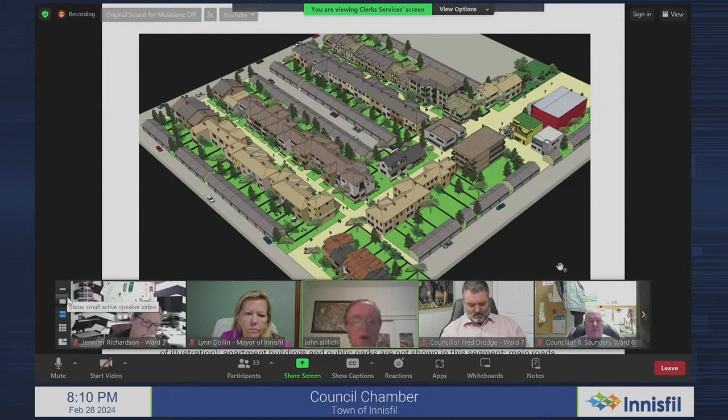There is a slide, maybe it can be shown - a partial view of the kind of thing I'm talking about. Yeah, that view is what we came up with. It's just one example, not the be-all-end-all, but it shows that something different can be done that's more livable, more friendly.

It's not complete. It doesn't have some of the apartment buildings that are necessary, and some of the larger acreage of land, open space, and so on. There's also stormwater management area and so on. But even so, that's just an example.

It basically shows a very pedestrian-oriented environment, like you're trying to do with the secondary plan. You can see rows of attached homes of various designs and sizes fronting on what's called a pedway - a walkable, sellable corridor, free of automobiles but wide enough for emergency vehicles. Mixed use in that sense: 900 square foot homes, 3,000 square foot homes, all together, plus access to non-residential spaces.

If you look at the right-hand side, some non-residential services, shops and cafes and so forth. I think what you get in that kind of community is that it fosters casual contacts. You get to know your neighbors, neighbors become friends, and there's a better sense of personal ownership and care of the neighborhood and the environment.

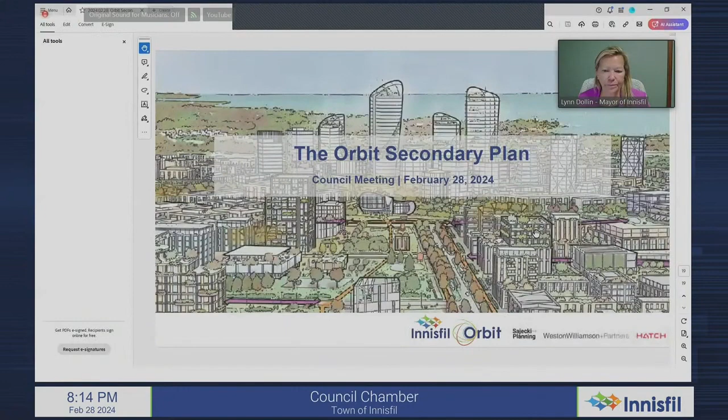You did, thank you. Thank you, Mayor Dollin and members of council. As just mentioned, my name is David Sajecki from Sajecki Planning, and we were part of the consultant team along with Weston Williamson and Partners and Hatch, who were developing the Orbit Secondary Plan. I'm very excited to present the secondary plan tonight. By sustainably focusing growth, council and staff have provided direction to develop a plan that protects Innisfil's agricultural and natural heritage and Lake Simcoe.

There's a saying in planning circles that some places have no 'there.' That's not the case here. Orbit builds upon a beautiful setting with views of Lake Simcoe, significant woodlands, and heritage buildings and landscapes. In developing the plan, we've tried to build upon and incorporate each of these elements, and we have an opportunity to create a special 'there.' Next slide, please.

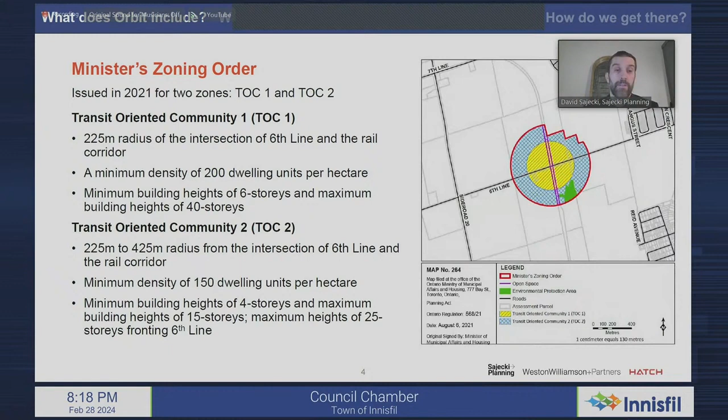This ministerial zoning order was issued in advance of the secondary plan, and the secondary plan is required to be consistent with it. It identifies that the ministerial zoning order prevails where secondary plan policies conflict with these area-specific regulations.

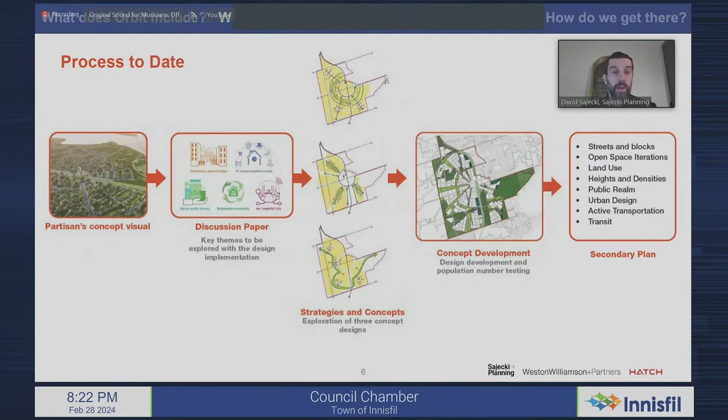This is the timeline of the secondary plan itself. The project started far before, with the Partisans concept as well as the ministerial zoning order. The secondary plan and the Orbit potential innovation plan commenced in March 2022.

Between April and August of 2022, there was a series of community engagement events. A preliminary preferred concept was selected in September 2022, with a series of other consultation events to inform that occurring during the following winter of 2022. This plan was further refined and developed into secondary plan policies throughout 2023.

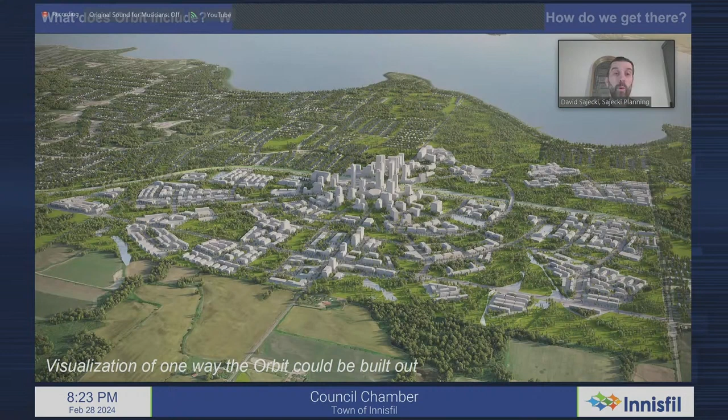This slide is an image of what Orbit is trying to achieve. It's just a visualization of one way Orbit can be built out. It's guided, consistent with the Partisans concept, by the Garden City movement, to produce relatively economically independent places with short commute times to surrounding areas, as well as protecting the preservation of the countryside.

Approximately 50% of the lands within Orbit will be parks, open space, or natural heritage. Green corridors you can see in this image will connect neighborhoods together, and along these routes they will be complemented by services, retail, and restaurants. The highest densities will be located near the GO station, transitioning down in density as you move further out from the 6th Line and railway corridor intersection.

The plan itself reflects a population, consistent with the minimum density within the county's municipal comprehensive review, of approximately 25,000 people and 5,000 jobs to 2051. That would be all within TOC 1, TOC 2, and Sleeping Lion.

Extending out to 2091, that's the very general timeline for full build out. We'd be looking at approximately a total population of 90,000 people and 20,000 jobs. So a lot of people, but this is to occur over many decades.

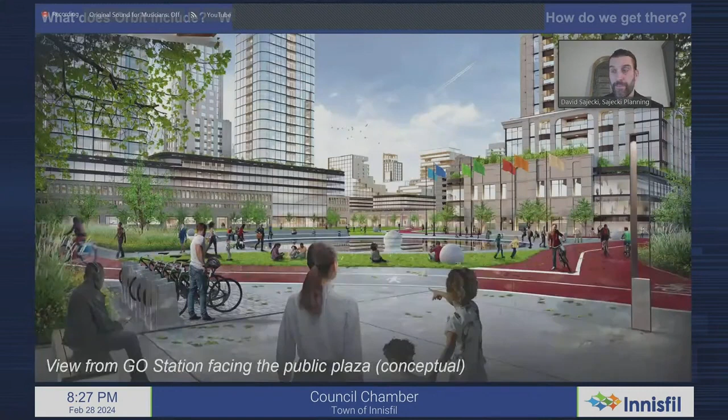This is an image showing a view from the proposed GO station.

It's very much a conceptual rendering, but it illustrates what the public plaza and the buildings near the GO station, the built form of Orbit in the most dense areas, could look like. This is again the heart of Orbit.

A series of 4 key directions were prepared to guide the secondary plan. The first is a concentric grid of streets and developments that will orbit out from the GO station in a concentric pattern. However, collectors and arterials still provide a grid pattern and structure for efficient movement throughout Orbit.

15-minute neighborhoods is a concept not intended to restrict movement, but it's around ensuring there are 4 neighborhoods that provide all the services people need, from neighborhood amenities, commercial amenities, healthcare, schools, within walkable neighborhoods. There are 4 proposed within Orbit. Each will be a precinct with a distinctive character, parks and placemaking opportunities, but each will be well connected to each other, Innisfil as a whole, Simcoe County, Barrie, and the GTA.

The heart of Orbit is the GO station. The proposed GO station transit plaza will serve as that heart, providing a focal point and a hub of activity. Green corridors will serve as a spine, connecting neighborhoods throughout Orbit to the proposed GO station as well as to each other.

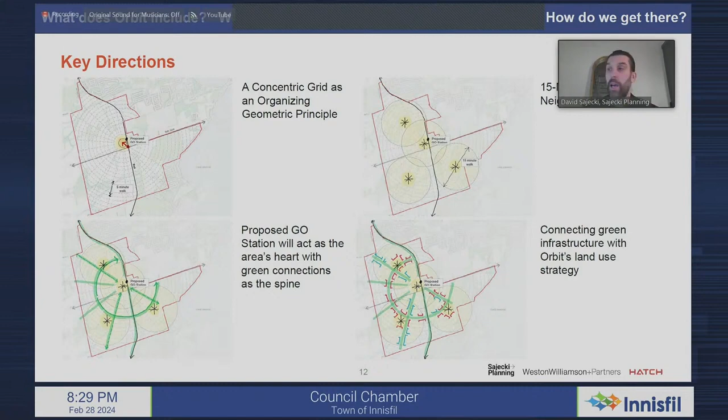This image identifies the 4 precincts or 15-minute neighborhoods within Orbit. The heart of it is the station hub in purple, and then there is the northwest precinct in green, the southwest precinct in blue, and the southeast precinct in orange.

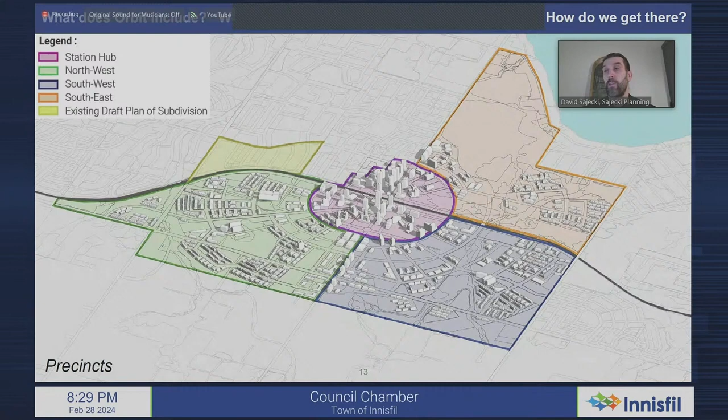Each of them have their own dedicated priorities and policies and very much their own characters, but they are all connected together.

This is an image throughout the secondary plan. It goes into detail around specific policies for each precinct. As mentioned, they each have their own character, each have their own considerations in terms of transition, height, and built form. Primary and secondary nodes are identified by the blue and orange circles.

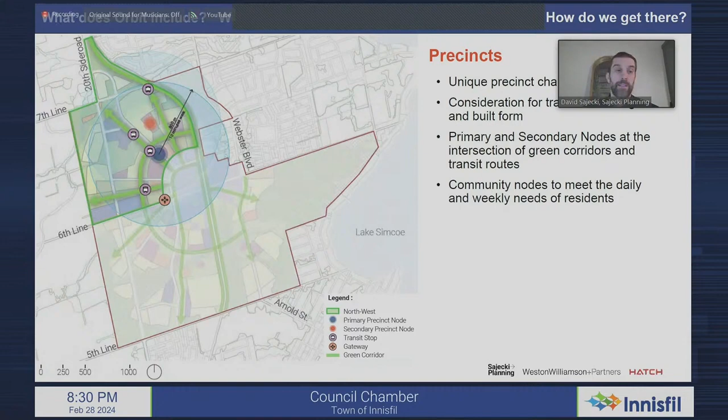These areas are meant to be cultural centers - locations for community and commercial facilities - and they've been considered very much in terms of transportation, land uses, and connectivity. They're intended to meet the daily and weekly needs of residents and act as the heart of each of these precincts.

This slide starts to lay out the policies included within the secondary plan. The secondary plan is based on 5 chapters: an introduction, a vision, goals and guiding principles, and an overview of what development can look like upon implementation of these policies and schedules.

Within the policies and directions provided, it focuses on sustainability and resiliency, streets and blocks, land uses and built form, precincts, public realm, housing including affordable housing, community services and facilities, mobility, parking and loading, cultural heritage, and the required infrastructure - both hard and soft - to support all of this growth. Then the final chapters cover implementation and phasing.

The next slide identifies the land uses that are designated within Orbit. The area in purple is the major transit station mixed use area - this is the area that will have the highest intensity and diversity of uses.

The neighborhood commercial area, which is supposed to be identified in red, is more of a burgundy color on this image. That is where it permits the commercial uses meant to service the local community and forms those primary and secondary nodes. The residential designations range from high density to low density.

Thank you, Your Worship. In the report, there's many references to the protected major transit station area. I can see it near the GO station and the Orbit in that sense, but when it extends up to 7th Line, what are you looking at in that section of area? It's outlined in yellow. What's the purpose? How would it support the Orbit?

So that was actually determined through the municipal comprehensive review. Actually, perhaps I'll turn this over to Andria - that may be a better question for town staff. Director Leigh? Yes, thank you. So Mr. Sajecki is correct, that was actually identified through the county's MCR, Municipal Comprehensive Review process.

As the entire area, which is TOC1, TOC2 lands, it did extend up into an area that was also identified as a development. It is subject to a current draft plan of subdivision. So I did note within the staff report specifically references to there are policies in the provincial policy about protected major transit station areas, and it's promotional policies in terms of encouraging transit-oriented communities and certain permissions that are provided. So the recognition of that area in yellow, as was identified on, I think it was slide 5 in David's presentation, is really to recognize those permissions through the provincial policies.

Perhaps we could, Kevin, go back to, I think it is slide 5, just so I have the map. That one there, thank you.

Yeah, if I could perhaps build on that just a little bit further as well too. It's identified within the Planning Act policies around protected major transit station areas. It identifies one of the considerations within them is that appeal rights are limited, and it works its way down through the growth plan, which identifies that for, in this case, the ministerial zoning order for transit-oriented community 1 and 2 would supersede it. But within the growth plan, it identifies a minimum density for a protected major transit station area with GO Transit service of 150 people and jobs per hectare.